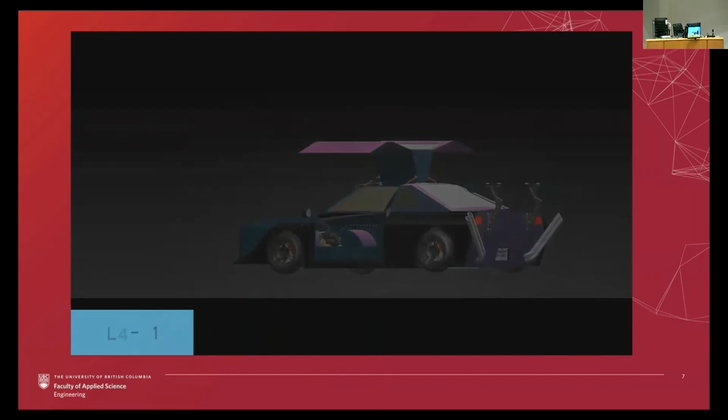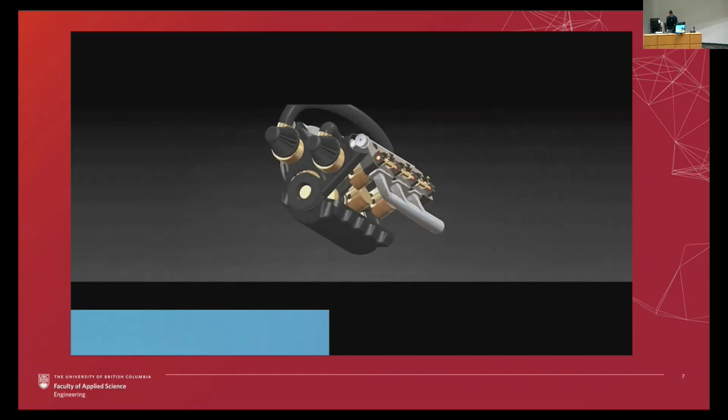And of course, we had these 4 groups that made it to the top.

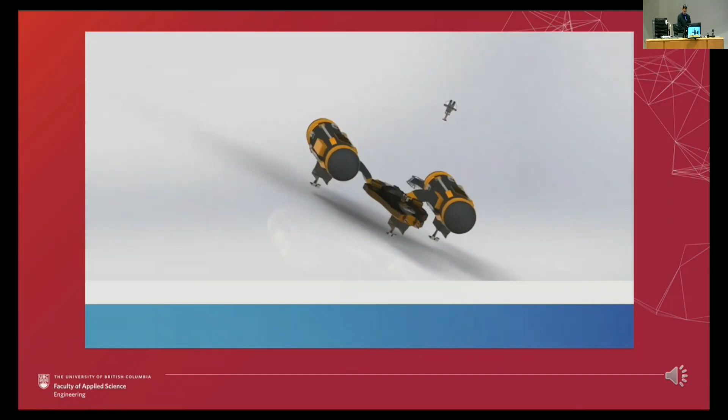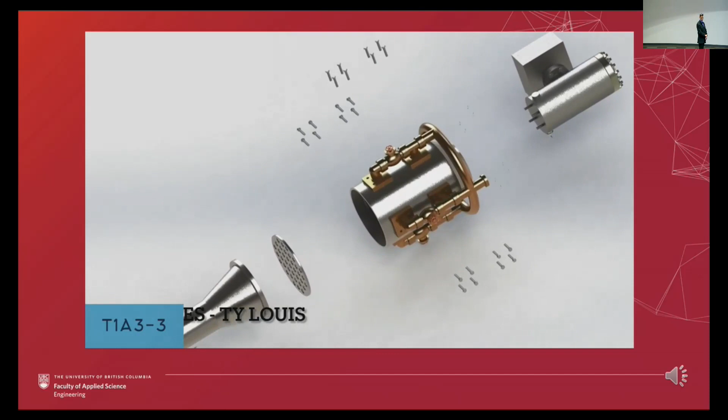We decided to do a dark Y-wing. We took inspiration from a discharge chamber, an ion grid piping, and a high-powered electron gun. Every segment is securely bolted together, and the pipes supply the thruster with a constant adjustable supply of xenon gas. The valve controls gas flow into the pipes. This shows how the valve opens and closes.

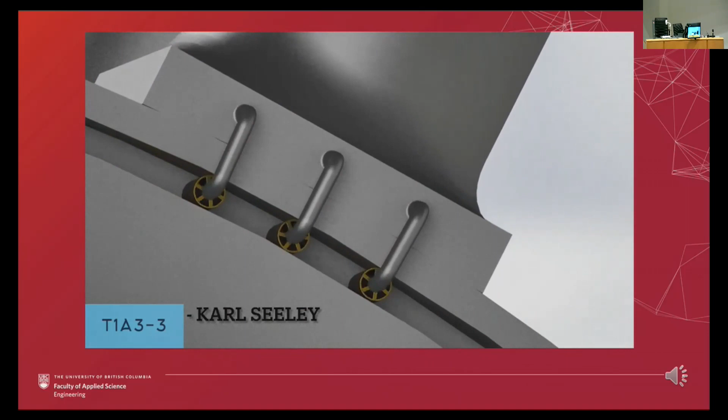Turret, the ship's primary weapon, is a versatile form of weaponry placed directly behind the cockpit. These rolling wheels move the blasters up and down, giving them a full 180 degrees of motion. There's a swiveling chair that allows the pilot to easily check the monitors and buttons on the side panel.

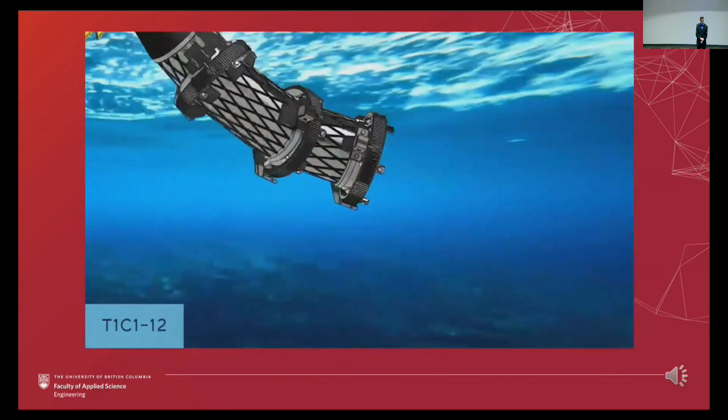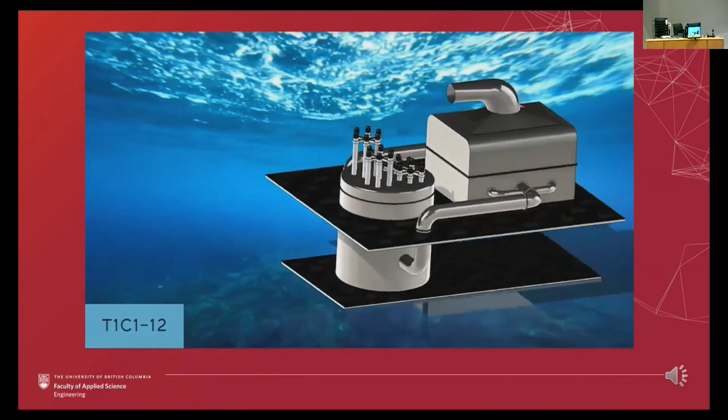The SS Bien Crouton. The reactor is a cyclic heat engine that harnesses the heat of a fission reaction and moves the working substance to the lower part of the steam generator, which heats the wave plates, turning the ocean water to steam, and moves it to the turbine through the top stack, creating power.

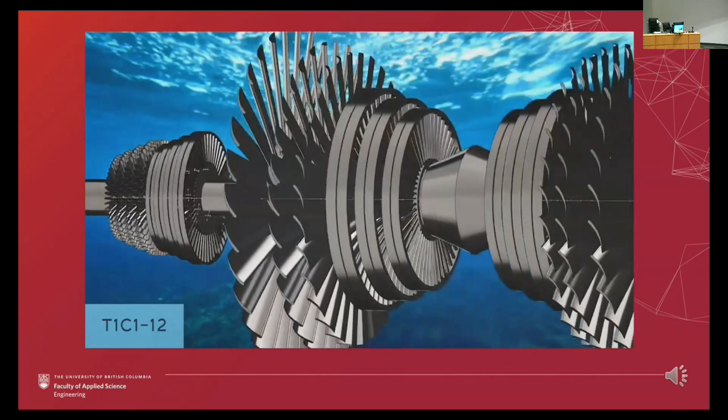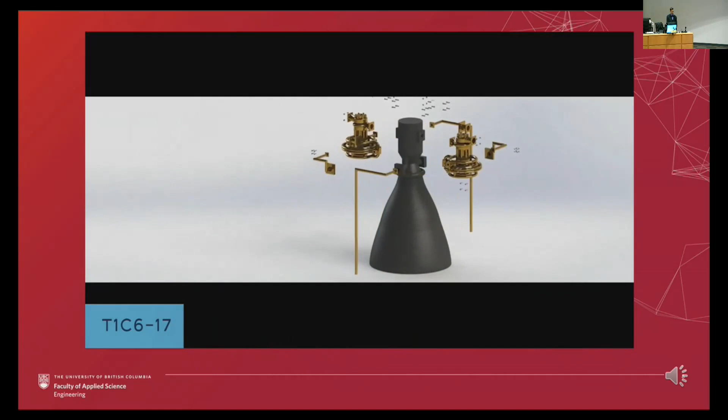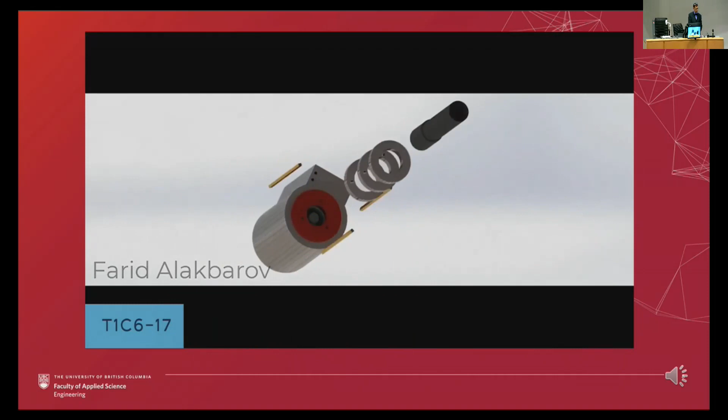An open cycle rocket engine design for outer space. The propellant diffuser spreads argon gas around the system. Next, the gas is ionized by kicking one of the electrons from the outer shell. It's designed to cut up satellites and other large space debris. The arm fitted with a claw is used to maneuver these objects.

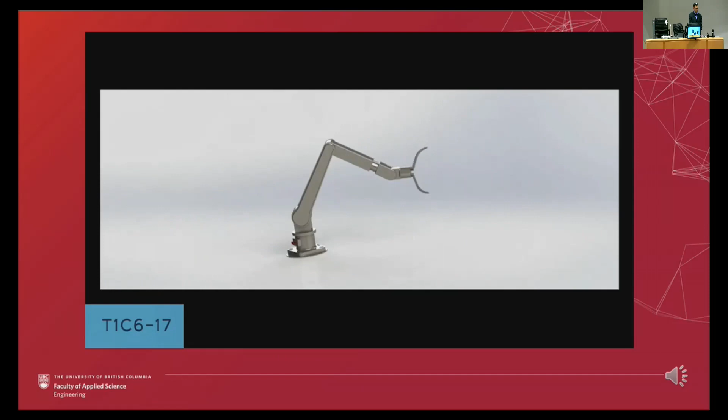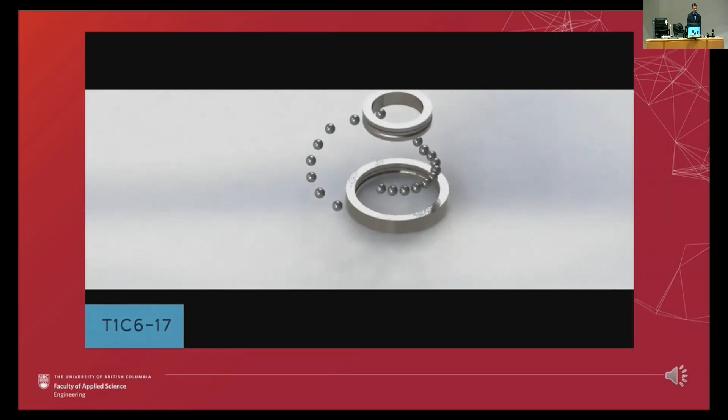Thanks to the dual propellant RCS system, it achieves pitch, yaw, and roll via a brushed DC electric motor. The robot's environment is surveyed through instruments concealed within this.

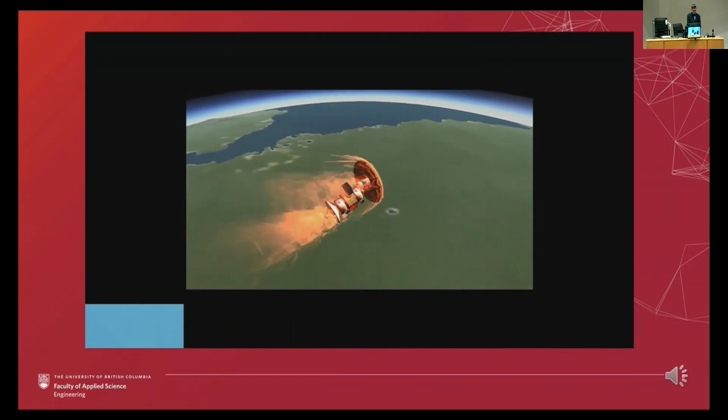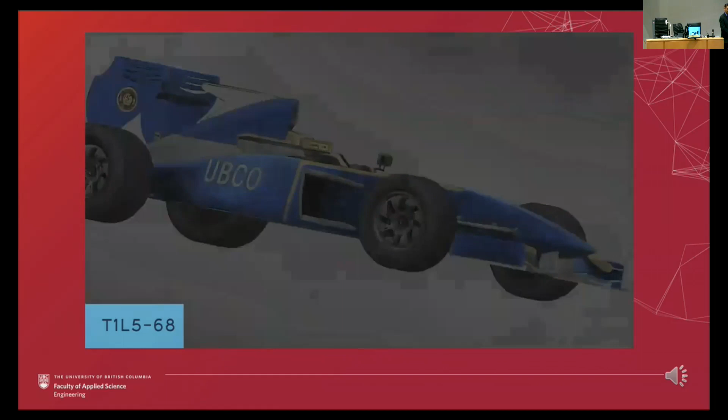Golden Epsilon is an F1 car that embodies the spirit of UBC Okanagan. Designed to be a lean yet mean racing machine, Golden Epsilon has a theoretical speed of up to 250 miles per hour, with its sharp and chiseled body.

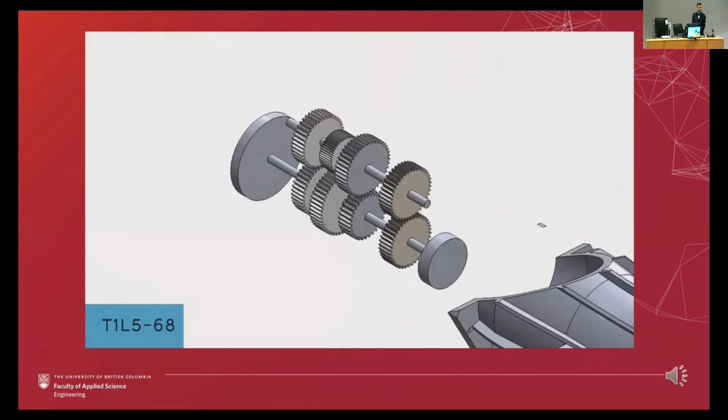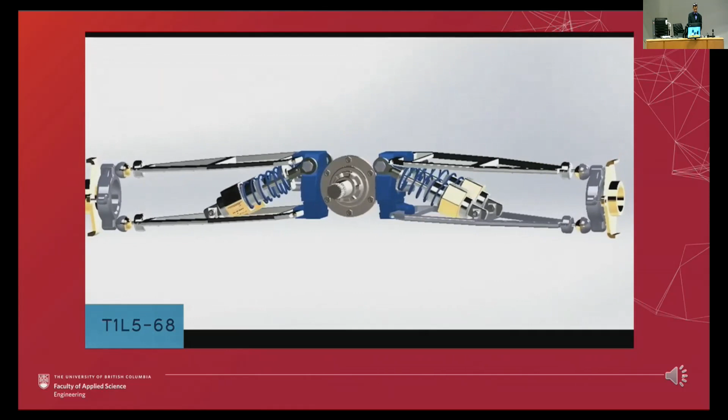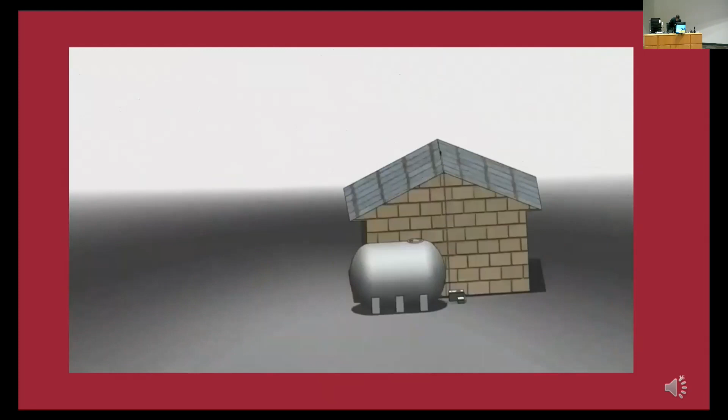In order to turn the sprinklers on, we built this fire risk detection system. The system is independent of household utilities. Water is taken from a pond or reservoir, and electricity is from an independent power supply.

This is our control system. Here we have a DHT22 sensor. It detects humidity and temperature, which is sent to the Arduino. The Arduino displays the data on an LCD screen. The screen alternates between displaying the pump status and fire risk, and the humidity and temperature.

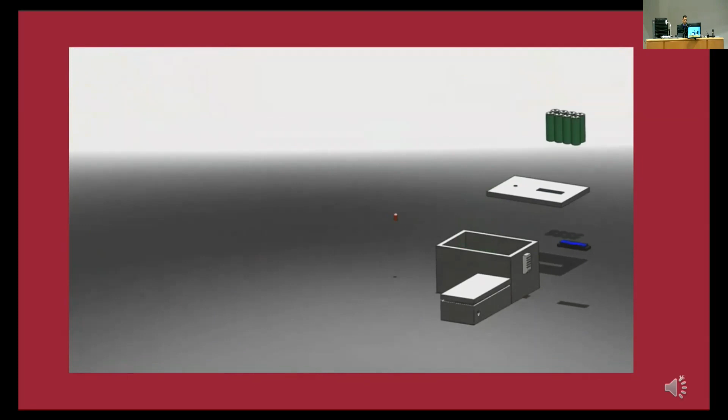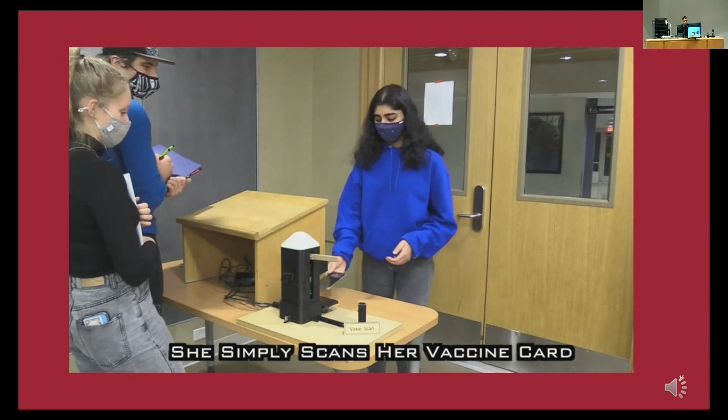All the while, still allowing vaccinated clients into your business. Watch: she simply scans her vaccine card and gains entry into the building.

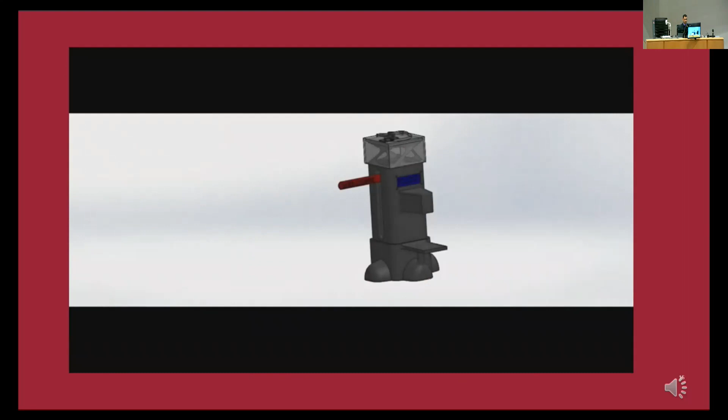The VaxiScan invention stemmed from the idea to create a solution to the trending problem of restaurants and retail locations having customers come in and lash out at employees over vaccination requirements to enter the premises. By creating a physical barrier that requires a valid vaccination passport, it creates a non-confrontational step for customers to enter before being greeted by employees, such as someone entering a restaurant before being greeted by the hostess.

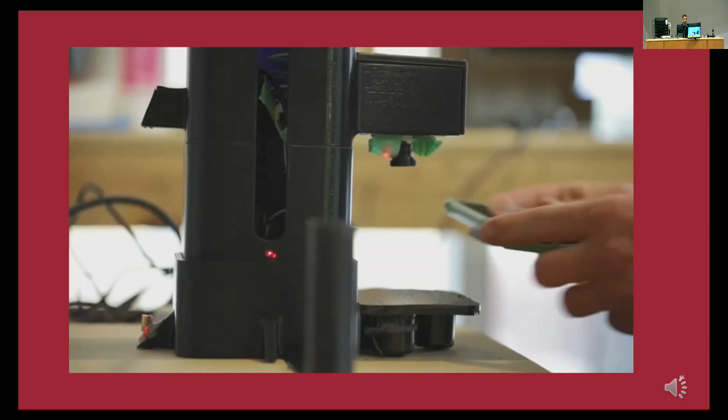Coming in version 2, there will be integrated ID verification and a separate module for the exit laser, incorporating wireless protocols. This project has given our team firsthand experience with the design process, from ideation to final prototypes, and while we faced challenges, we pushed through them together.

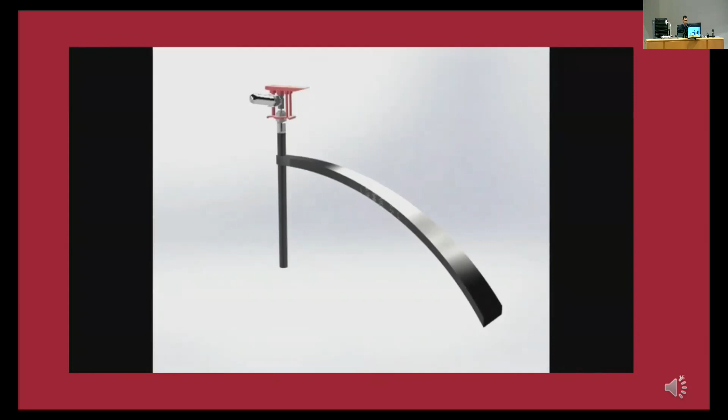The Snuffit is a portable CO2 fire extinguisher made specifically for campfires. The device has 4 rotating arms and a central spike made to be placed in the middle of a dwindling fire. When the trigger is squeezed, CO2 is expelled from the canister into the fire, smothering it and cooling the system.

This is our prototype for a product called Snuffit. We constructed it out of PVC pipe fittings and a CO2 adapter made for mountain bike tires. The arms, as well as the handle mechanism, are 3D printed. Ideally, in our final design, the scale of the product would encompass an entire car camping campfire.

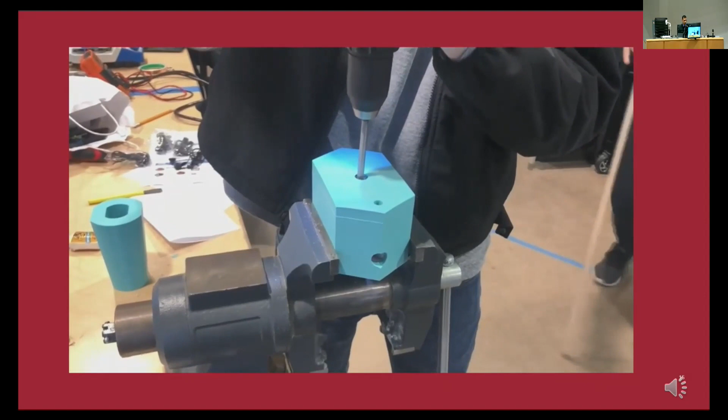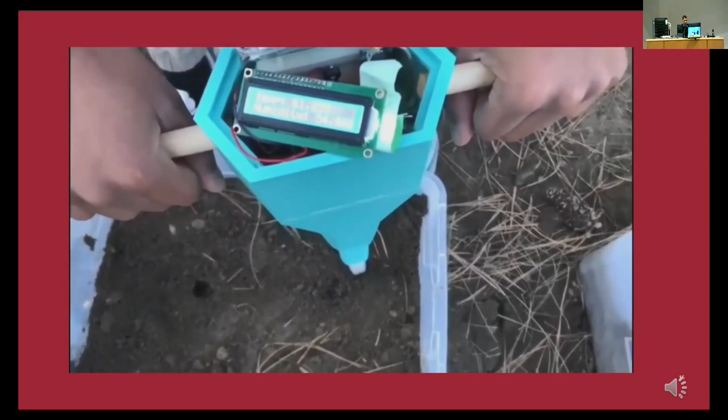Here, so the firefighter would have to come and manually check out this area in order to make sure there's nothing here.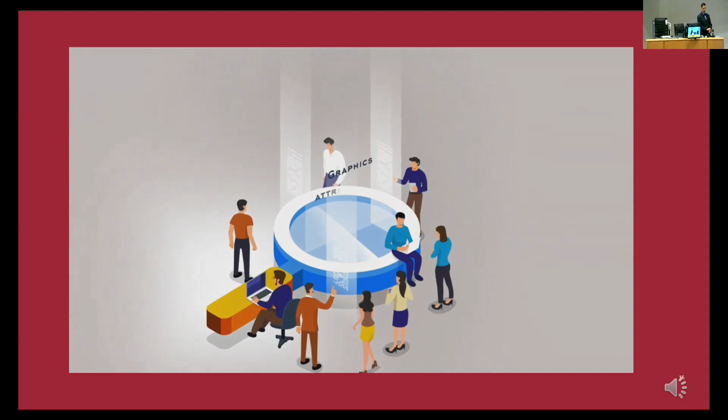And now we would like to announce the third place, which again, ironically, and this has happened only once, I think about 7 years ago, the judges could not eliminate one of these teams. The score was almost a 1 decimal difference. That's why we decided to announce both teams as the third place, and both groups will receive an award certificate. So the third place in the 2021 CAD/CAM competition goes to groups 38 and 62. Please join me to congratulate them.

So second place, 2021 CAD/CAM competition, will go to group 15. Bravo, great job.

And having said that, I guess you have already guessed the top 2021 gold medalist final design competition goes to group number 30. Amazing. Great job, guys. Great job.